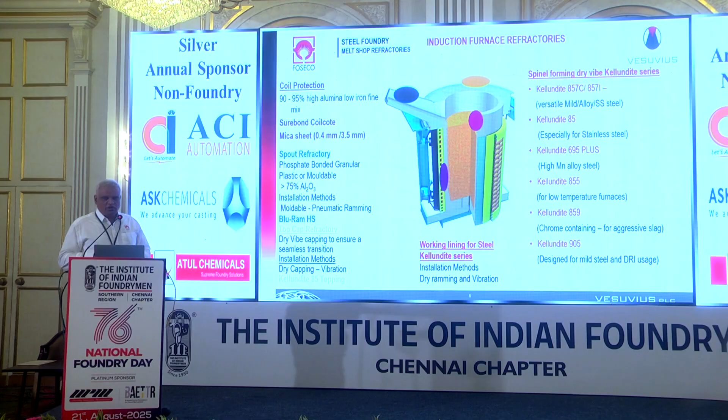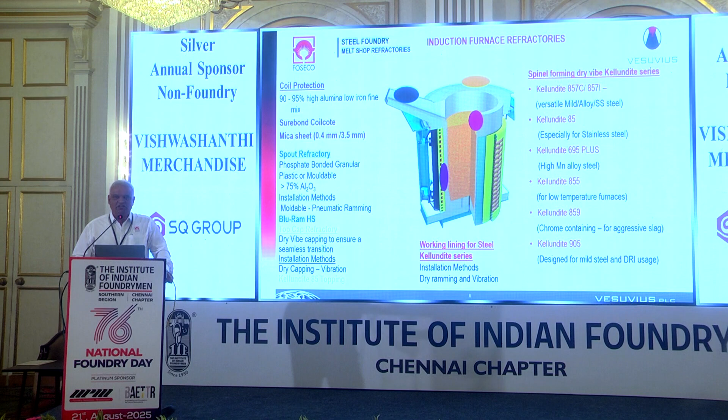After that, different types of refractory are used. For the coil, we require coil coat, but most foundries are not using coil coat - they just sieve conventional castable and use it instead. This is not advisable because conventional castable has higher iron percentage, and material close to the coil requires lower Fe content and higher alumina content. So coil coat was developed, having more than 90-95% alumina and low Fe content.

Another refractory used in the induction furnace is for making the spout and top block. We developed a plastic material called ready-to-use material, which can be used for making the spout and top of the furnace.

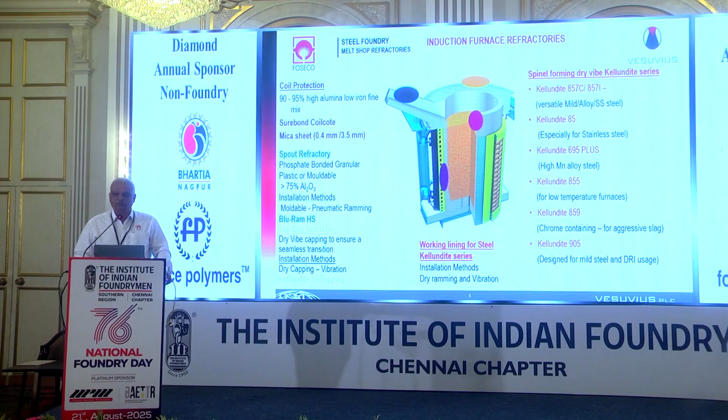In steel industries, as already mentioned, we mainly deal in neutral ramming mass. The Vesuvius brand name for the series of neutral ramming mass is Kellundite. Under Kellundite, there are numerous grades developed as per the requirement of the casting alloy, size of the furnace, and tapping temperatures - different grades of neutral ramming mass have been developed.

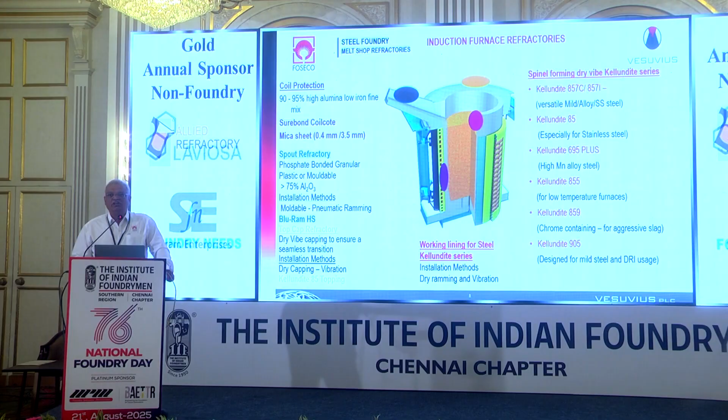The main grade is Kellundite 857, used for all versatile grades like mild steel and stainless steel. Specifically for stainless steel, we developed Kellundite 85. Kellundite 695 is developed for high manganese alloys. In chrome, the slag is always more aggressive, so to overcome this we developed Kellundite 859, and Kellundite 905 is designed for mild steel and DRI.

Now I will explain a case study for this neutral ramming mass. One customer in Spain, a regular customer of Foseco and Vesuvius products, was facing some issues and wanted to optimize the lining life of their furnaces. This foundry melts all types of steel alloys, with a furnace size of 3 metric tons. With their existing supplier they were getting around 100 to 120 heats regularly, but they wanted to optimize this lining life.

Initially, they were using different suppliers for different products. They wanted solutions from only one supplier, all the products in one basket. So to cater to this, we gave them a package: mica sheet, then Surebond which is our Coilcote, Kellundite 857 for the basic main lining, and Bluram HS for the top and spout.

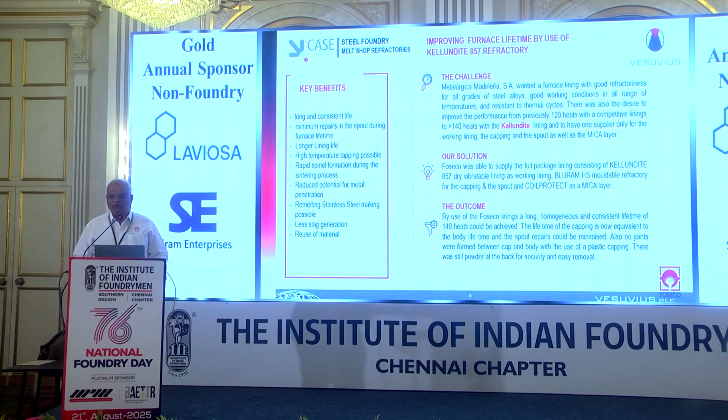With this they achieved an average life of 140 heats, compared to their earlier average of 120 heats. So the average life increased, and from one supplier they got all the products together. Whatever their requirements were, and the cracks at spouts and repairs, all these things were also reduced.

So the benefits they got from this are long and consistent life, minimum repairs at spouts and top areas, and longer lining life. They are able to tap higher temperature materials as well as lower temperature materials.

When they did the lining with Kellundite 857, they found rapid spinel formation. At the time of removal, they found quite a good amount of powder remains, which means the lining is in safe condition, and they can remove the lining quickly. That material can also be reused.

So with this, they got one supplier giving them all the products together, optimized as they wanted, and the improvement in furnace lining life was also achieved.

Another problem every foundryman suffers from is the repairing of the spout area and top area. This area always has more thermal shocks, more mechanical shocks, and higher slag sticking tendencies. So we have to repair this every time - some foundries do it daily, some shift-wise, sometimes even 2 or 3 times in a shift. This is a headache for all foundrymen to overcome.

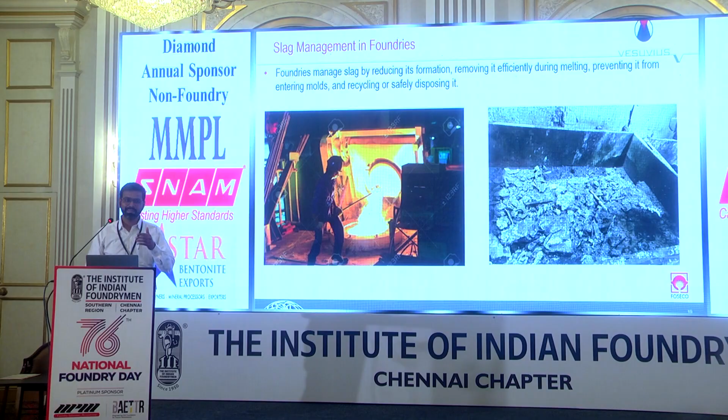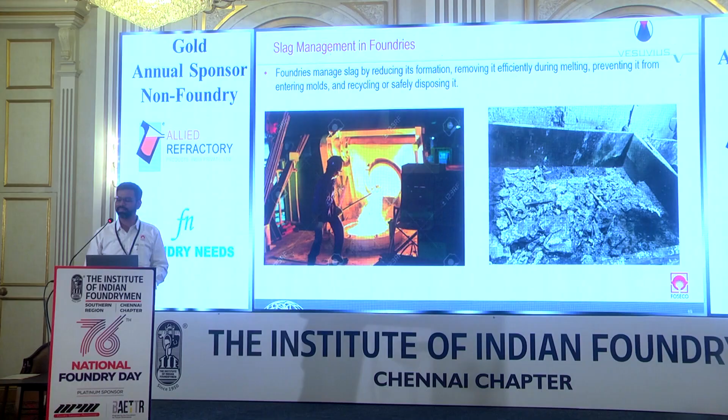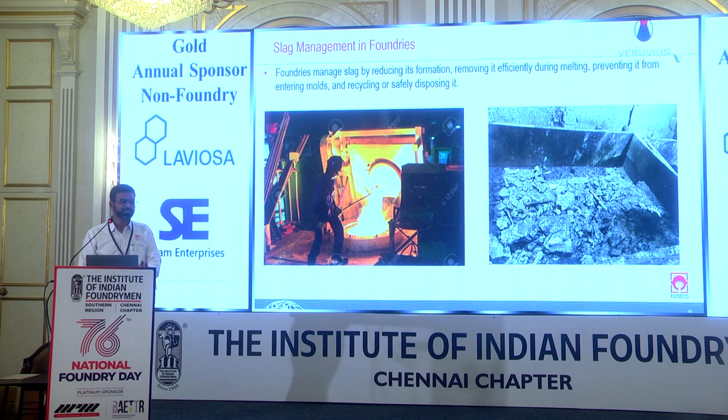However, slag generation is just one part. Another part is how we are removing that slag before we pour the casting. For slag removal, normally these rods are used - you can see in the picture, this is one of the popular practices. And we know that during this slag removal, along with the slag, metal is also going away.

And again, it becomes a challenge to recover that metal. Crushers are there for sizing and crushing, and a lot of energy is consumed in that. And therefore, another point is disposal of this slag.

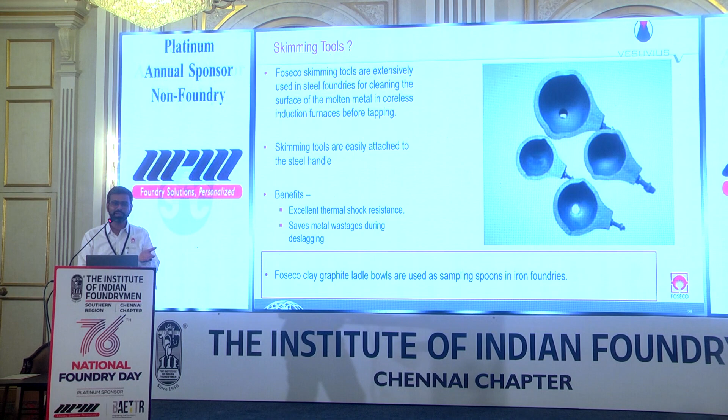So basically, we are talking about how we can effectively manage this slag, and that's why Foseco has come up with these skimming tools. Some of the foundries I know have started using this type of tool, which are very effective. They allow minimum contamination of metal with slag. It has holes from where metal will stay in the furnace, and only slag will come out, and that is how the metal recovery itself is higher.

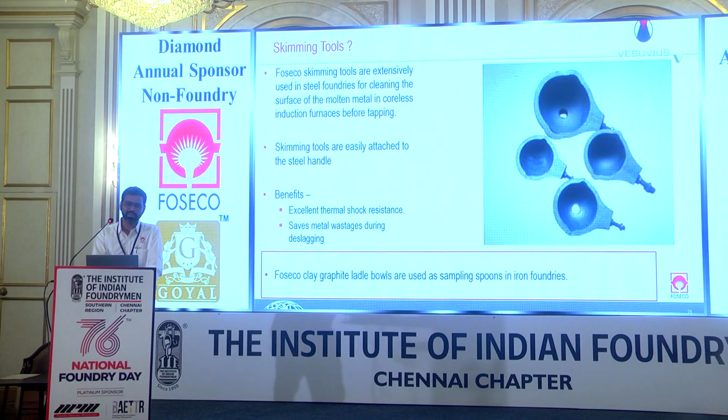So the slag particles collected in the bins are mostly in oxide form only, so very little metal form in that. These tools are very easy to use. They are mainly graphite bonded, so very low wettability, so metal sticking tendency is less, and thermal shock resistance is very high. Also lightweight as compared to the conventional steel rods or metal rods.

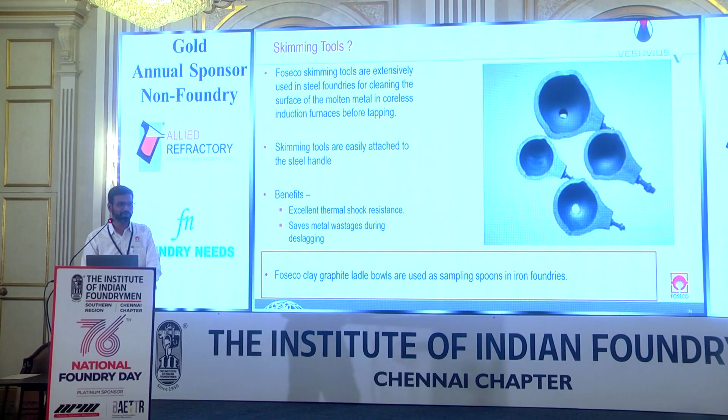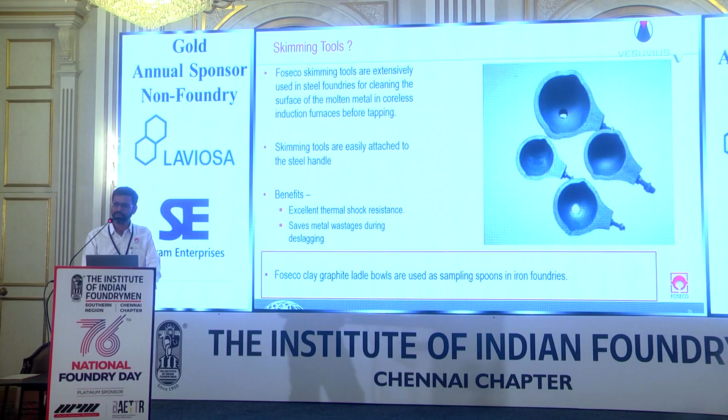Another product is bowls, which can be used for non-ferrous foundries as well as a sampling tool for iron foundries, for pouring some samples conveniently. It comes in various sizes depending on your furnace size and application.

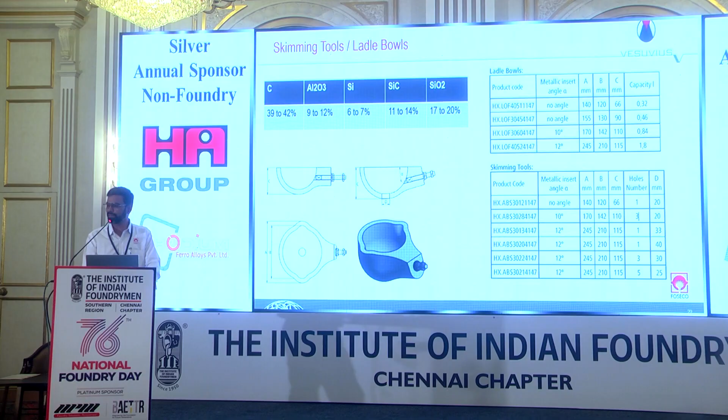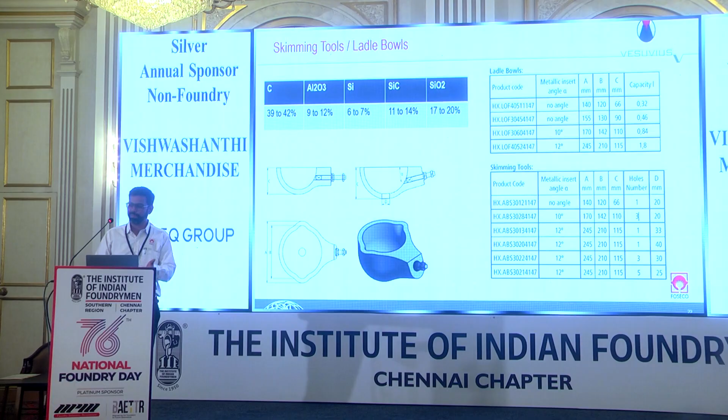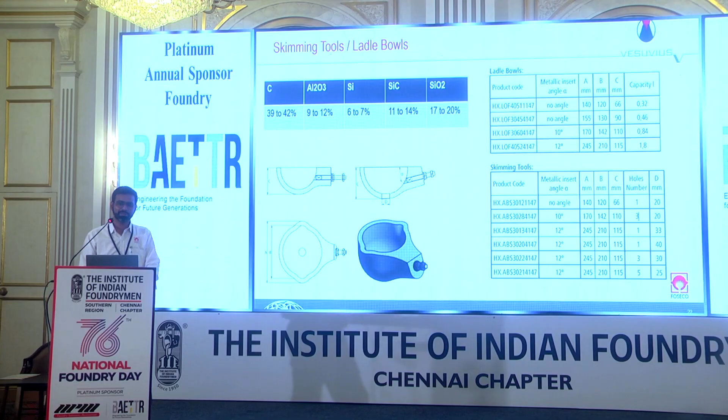These products earlier we used to make in the Germany plant. Now these products have shifted to the Mehsana plant, and we have already started supplying European foundry customers. So the point I'm making here is earlier it was imported products, now these are in-house products with better cost benefit, and we recommend use of such tools which will help foundries meet quality as well as cost requirements.

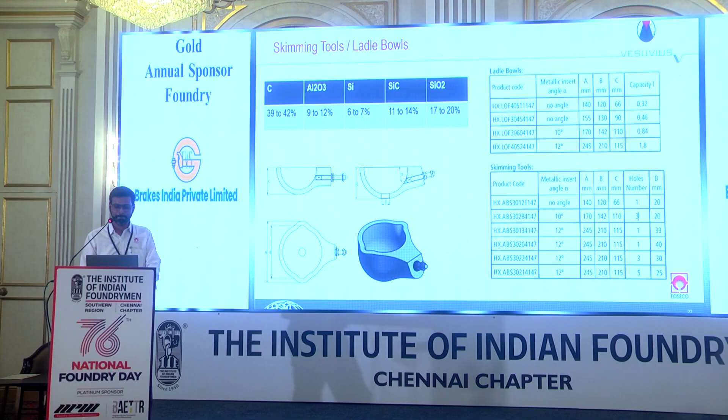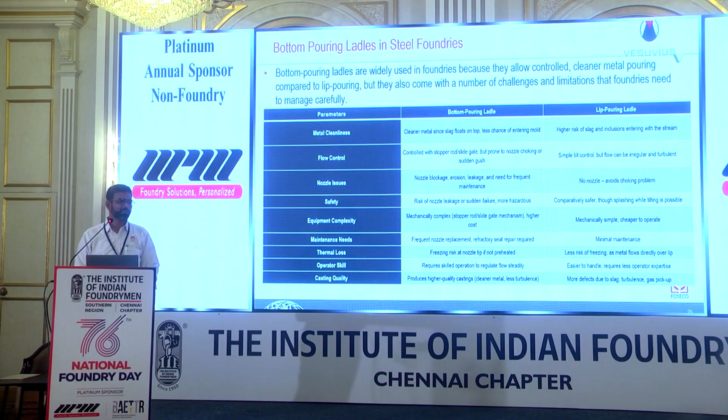Another challenge for steel foundries is the bottom pouring mechanism. Though it is very useful from a consistent quality point of view, it poses various challenges from an operational, maintenance, and sometimes safety point of view. So Foseco will help you set up a good bottom pouring practice, and for that we have various products like stoppers, stopper heads, and nozzles.

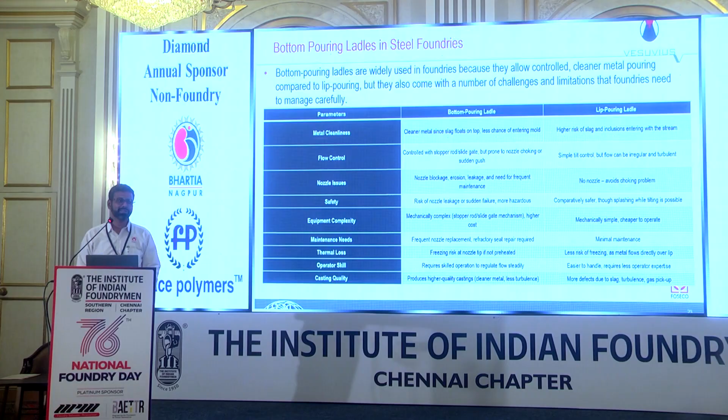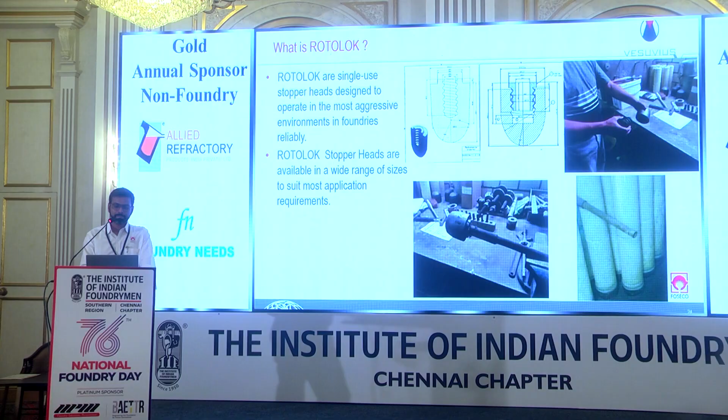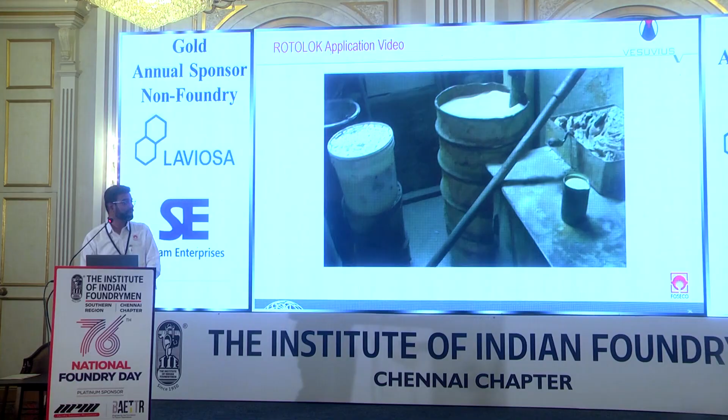In stopper heads we have an innovative product. You can see there are two types of stopper heads - one is conventional, and the other comes with an insert. Let us quickly go through the video showing the application of ROTOLOK, which is a stopper head.

See, there is no thread on the metallic rod. However, there is a separate insert which we need to use. This is the support rod, a metallic rod without threads. For threads, we have to use another product which is an insert. It will go first and then the stopper will apply on this. What is the use of this?

During pouring, steel is poured at more than 1500 degrees Celsius. At that high temperature, the expansion of the metallic rod is more compared to the stopper, and because of the higher pressure, the stoppers tend to crack, and metal will penetrate, or the stopper itself will block the flow of metal.

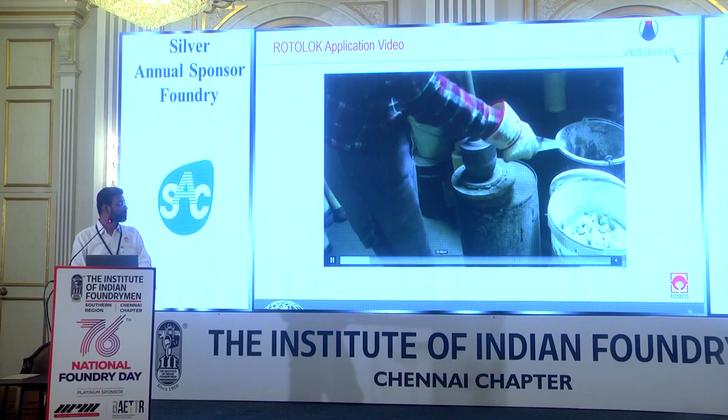So to avoid this, we have developed this product with use of an insert, which is a ceramic insert, and this is how it will absorb the shocks generated during preheating and during actual pouring. We call it an assembled stopper, with stopper head at the bottom and refractory sleeves on top of it.

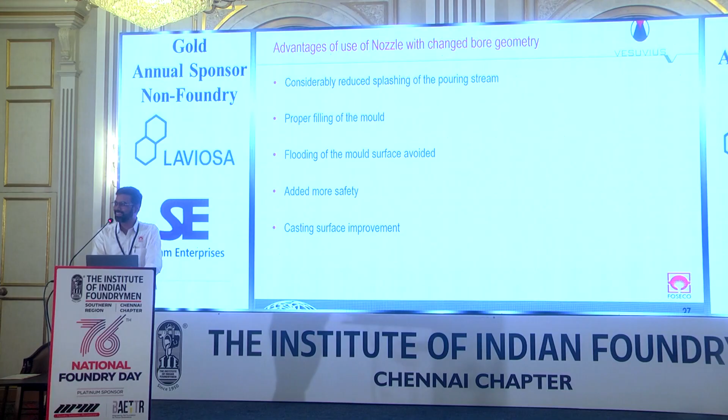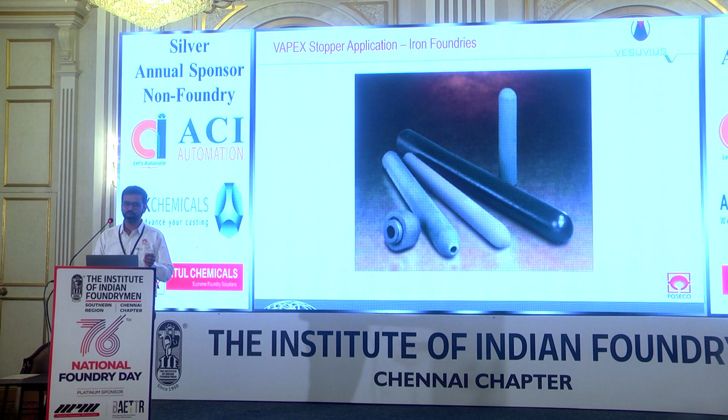So again, reason to believe in Foseco products - we have a state-of-the-art R&D facility at Vizag for refractory, with all the necessary equipment for testing refractories, and we have a global team to support technically. So for further assistance, further questions, we are here and always available. We are one call away, we say. And thank you.